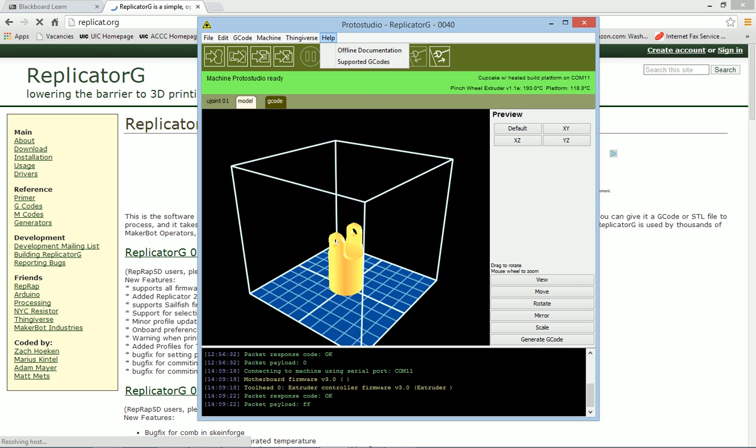I don't know what version I have. Oh, it's 0040, I have the newest version. That's as far as they got. So this software here is a software that both allows us to set up the 3D printer, but also set up the 3D print.

We'll get to this. This is a free software, you can download it. If you type in Replicator G, it'll bring you to replicat.org. Download it, take the newest version obviously.

This is going to allow us to go ahead and start making our slices for this. So what happens with a 3D printer? Let's go look at our model.

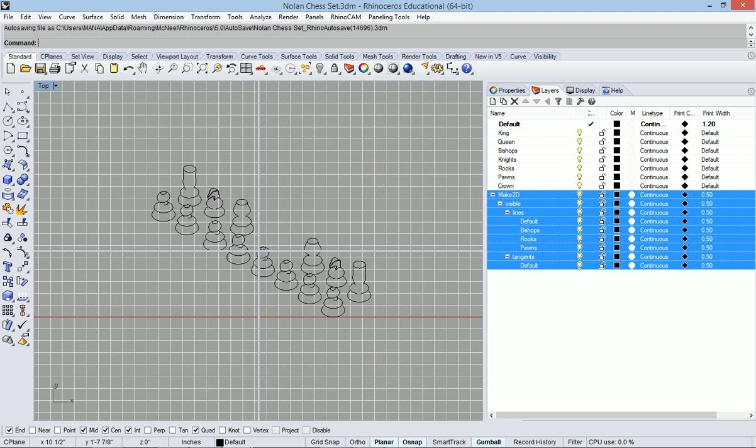We're going to pick one of these. We won't pick the most complicated one. Maybe we'll pick this one. This one has... But I'm going to go ahead and save this real quick, and restart because this computer is having some problems.

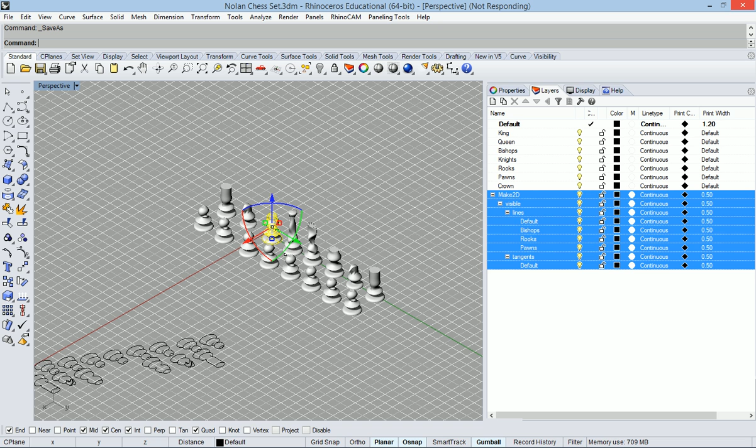So if you can imagine, if we had something solid, and you'll see it in reality here in a few minutes. If we wanted something that was like this, and we slice it, one of the sections would look like that - a bunch of circles, becoming smaller and bigger.

So what this thing does, it prints the outside as a solid, two pieces, and then it starts filling in the inside. So it's running. There's another outside, it moves up.

If you hold that up, you can see it in the light. It's just sort of working each section at a time. It can't go back in because it would hit the nozzle, hit the part. So it's building layer by layer.

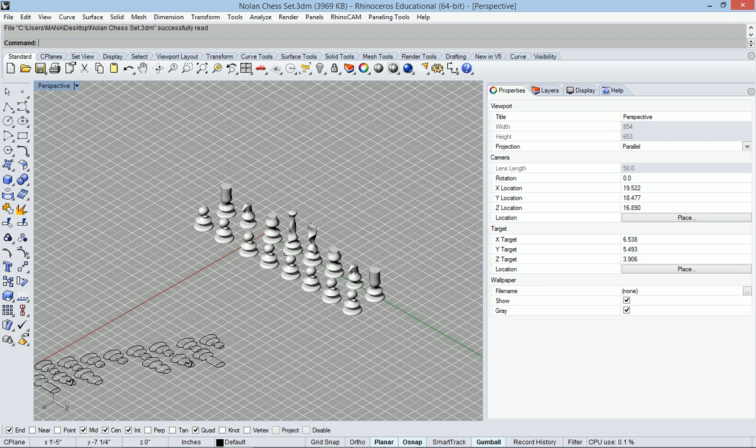So what I'm going to do is pick one of these shapes and take a look at it. Now, the one thing we have to take care of is if we start doing overhangs like this, those shouldn't work, we should be fine. But if we do a more gradual overhang, it's going to be okay, and tops can be flat. The problem is this material is being built up like this.

If it has nothing to sit on, it'll just fall. So if you're trying to do a chess piece that sticks straight out, it'll try to do this as a straight piece and it'll just fall. Now we can build support material, but the problem is I haven't seen a successful support profile for this machine. There's an option for support material, but it doesn't really do a good job.

So the support material, would you design that in your initial design or within this print software? It does it all for you. I mean, you could do your own, like put some supports in, but that would be too difficult, because you'll never be able to pull it out.

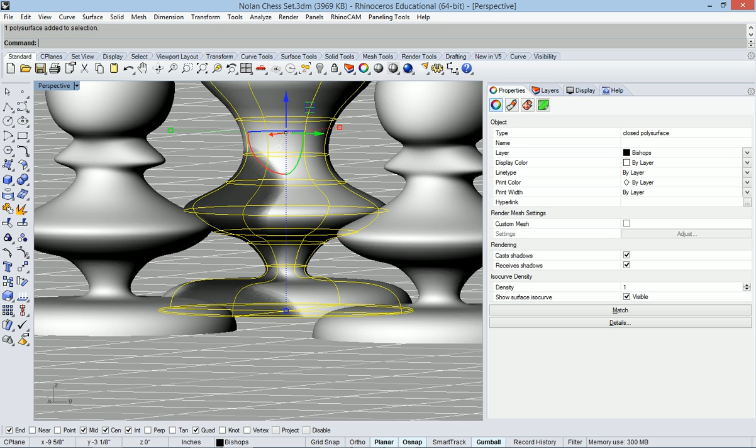So that stuff, the support material, is really loose filament, so you can pull it out. So that would be the first thing to take care of - you don't want too much of an overhang. We'll see how this one works, we'll see how it goes.

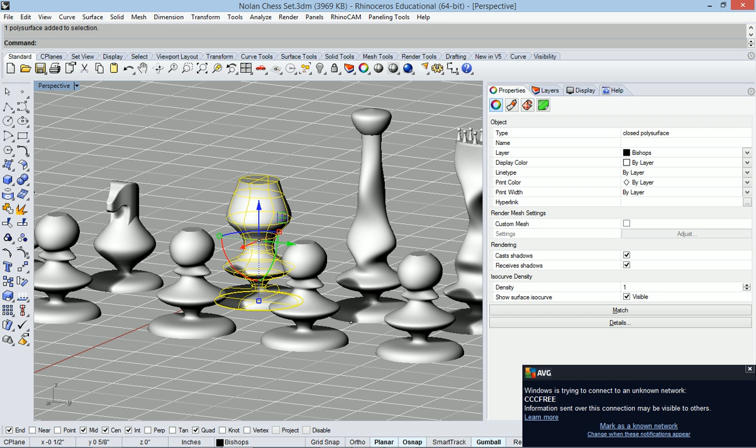So the next thing is we need to export this out. We're using a stereolithography file, STL. Now we don't have to export it out at 0,0 - eventually we can move it to 0,0. What we're going to do is select it, export selected.

And we're going to pick STL, so we're going to look for our stereolithography. This file is used for 3D printing. All right, so this is the file that we want.

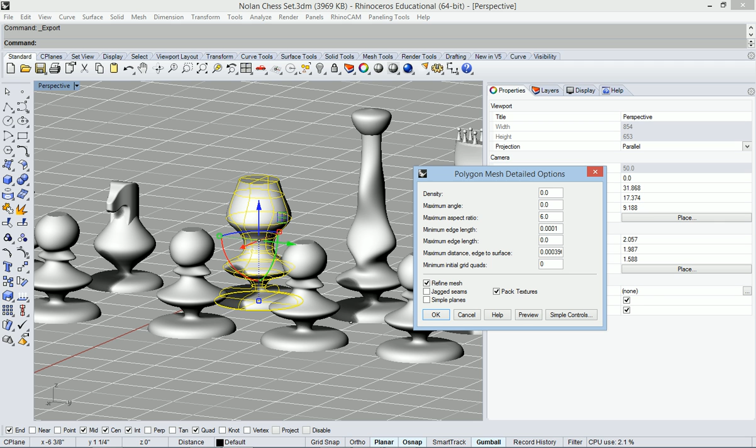And you'd have to do this for each piece. In this case, we're doing one piece. We're going to leave all the default settings, so we can just go simple. Just leave everything as the default for the export. Default, default, and we're done.

Okay, so after you're done making your piece, we just export one at a time, right? So you select one, you export it. We then can go to Replicator G. So when we open up Replicator G, this is what the software is going to look like.

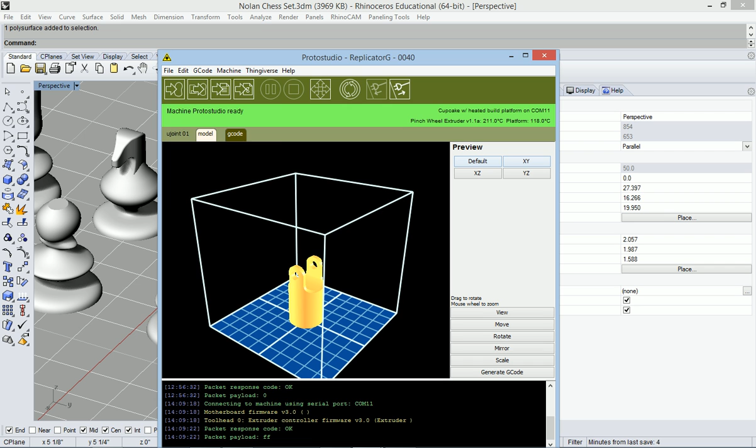Now I have my computer hooked up to the printer, so it's connected. Now before we even start messing with the printer, the first thing you want to do is go ahead and open up that STL. So we're going to go to the desktop and we'll find Nolan's and hit OK.

And the first thing you'll see is - where did it go? It's tiny. So this software works in millimeters. Okay, it's no big deal, we'll be able to fix that.

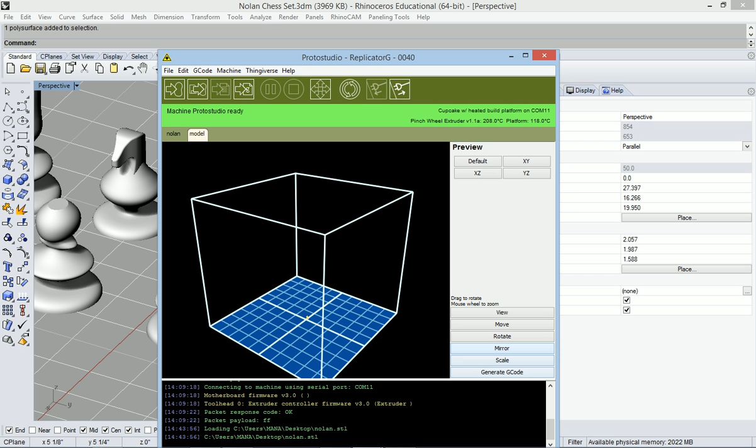If we go to scale, inches to millimeters, so we want to convert our inches to millimeters. So that's how big the piece actually is. This is right click, this allows us to spin it.

The maximum height, I think it's 4 by 4 by 4 basically. And let's not get too big because they will take a while to print, and we want to get some out every so often.

So that's been scaled. The other thing is it does typically put it on the bed, and it does center it automatically.

All right, so after we're done with that, there's a generate G code button here. We're going to click on that. It'll ask if we want to save it. We always save the STL. And then we'll start to be able to generate the G code.

So part of this, for the Replicator, you're going to need to download Python. If you follow the instructions on this page - I think Python comes with all of this, so it should all load. If it doesn't, yeah, we'll have to see what happens. It's been a while, but I think it should be fine. It should all work. So I have two versions of Python.

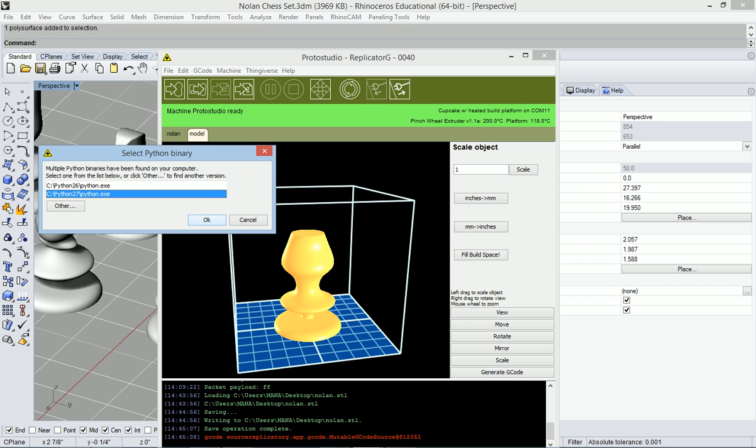Python is what's doing the cutting. Okay, so we're going to hit OK. I don't know why my machine is hurting, but it is.

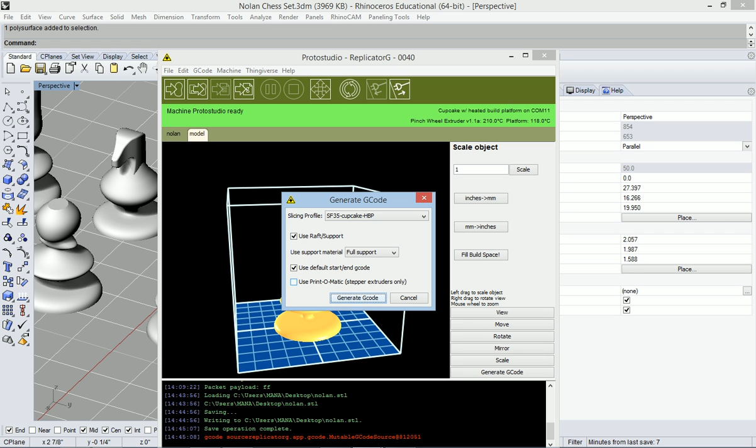So the next thing is what type of slicing profile. Well, this is the cupcake with heated build platform, so there's a heated platform. The reason why there's a heated platform is we're printing ABS, and the ABS will tend to shrink if it cools too fast - like by the time it gets to the top, the bottom is going to be really cold, so it will start to shrink.

Okay, you can see that happening - this is PLA, you can see it shrink. If you put this down, the PLA has tendencies to shrink less, but because this part was so big and there was too much air movement in the room, the bottom was cooling too fast and it started shrinking and pulling it. Yeah, okay, so that bed will typically avoid that.

We want to use raft - a raft is, it's going to basically build a little raft that this thing sits on. That helps the adhesion. We want to get rid of, no support - this I never do, I've seen the support on this, it's not very convincing. Okay.

And then there's a default start and end, that's fine. We don't have the Print-O-Matic, that's the stepper extruder, which I wish I could have upgraded this, but we don't have that.

And then we hit generate code, and this thing will start slicing. Okay, so this is generating G code. So all these machines are going to be run by G code of some type, and the G code has to be formatted in some fashion for the machine. So there's certain start commands and so forth that this machine is looking for.

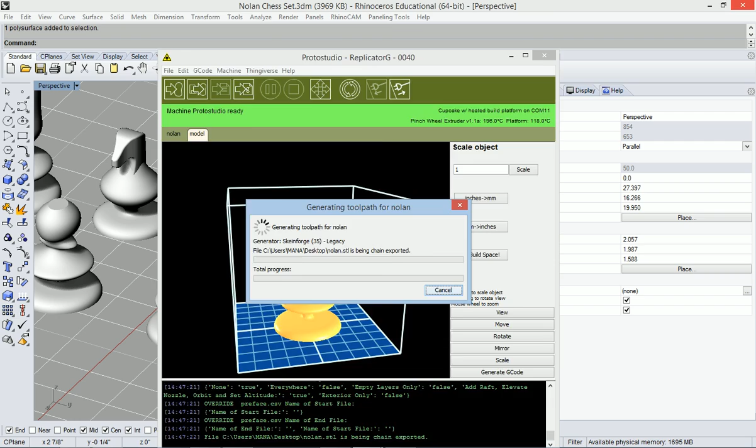All right, so again, I'm not sure - I'm going to go ahead and close Rhino now. I don't know why that opened. We'll close it, go ahead and close.

So this imaging really is just the presentation part, right? Yeah, nothing to do with- No. Yeah, just for presentation.

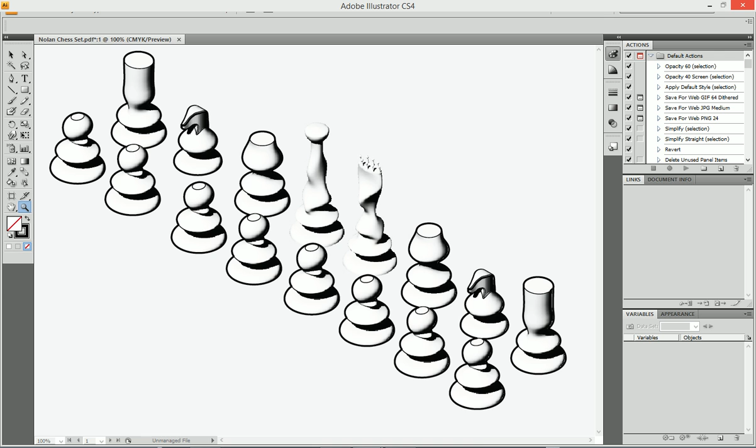So starting the slice, and typically it won't take that long, but the problem is this machine, I don't know, something happened between. Yeah, I built this, this is a kit, yeah.

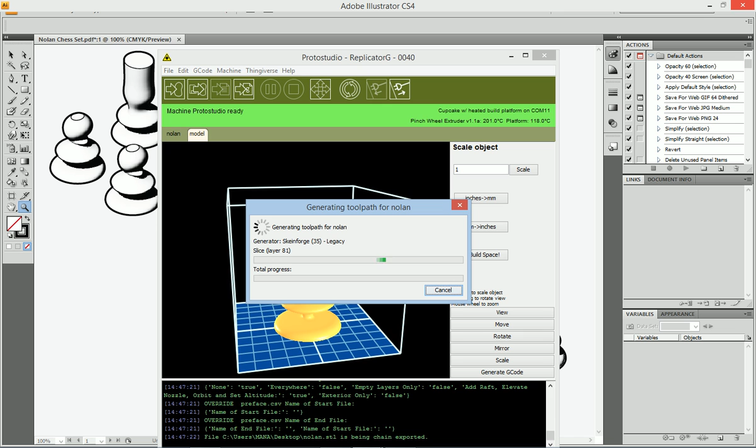Is there a way to set the thickness of the slices? You can, but it's based on the extruder tip. Oh, so it's point, I believe it's 0.4 millimeters. That's the tip that's on there. So the height of the slice is 0.4 millimeters.

I don't know what's 100 microns? That's like always, let me pause this. So once you're done, you get the G code. And this just gets the machine going. There's a couple things, like it knows where it's at 0, 0.

For some reason, I may just need to get rid of this altogether, but we need to get rid of this part of the G code. This is like a preheat up, and it'll just never go. It'll preheat, get to the temperature, and then nothing will happen.

Why did it go all Star Wars on us? You failed me for the last time. You did not.

Yeah, it's just something they write in the code, so we're gonna delete that. So basically it's telling it at 0, 0, and then it says go to 0, then it starts going. So it turns on the motor. These are all commands. You don't need to learn G code. If you want to, you can get a book on G code.